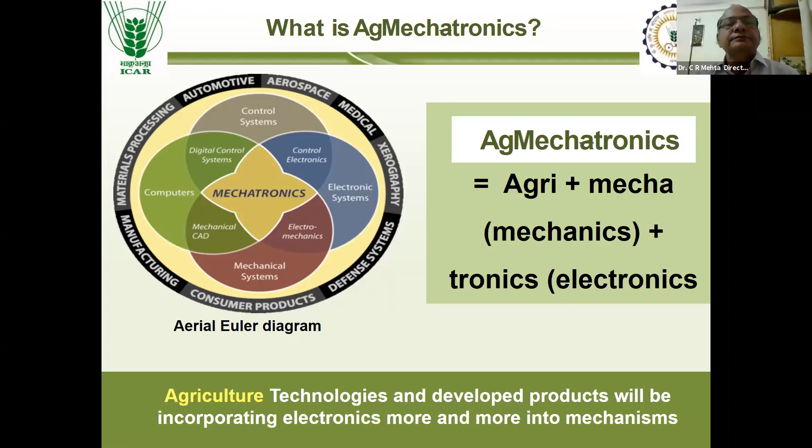Most of the time we talk about use of mechatronics in different fields, but nowadays we have started talking about it in Indian agriculture also. In my presentation, I'd like to mention that we started working in the area of precision farming in 2010, and Government of India through ICAR put a lot of emphasis on precision farm machinery during the 12th plan, then the SFC period, and presently also a lot of thrust is put on development of precision farm machinery. Government of India also launched two projects related to precision farming under NAIP, National Agriculture Innovation Project. One project was led by our institute, started in 2012; another was led by PAU Ludhiana. Some of the technology developed at PAU was just briefed by Dr. Manjeet Singh a few minutes back.

We are presently having one project on CRP on farm mechanization and precision farming. In the next plan, which just started this month, we are going to put a lot of focus on development of precision farm equipment in that consortia research platform, which has centers in different parts of the country. In addition, we are also putting focus on development of precision farm machinery in AICRP on farm implements and machinery. So at our institute, as well as some AICRP and CRP centers, we have developed some equipment related to precision farming.

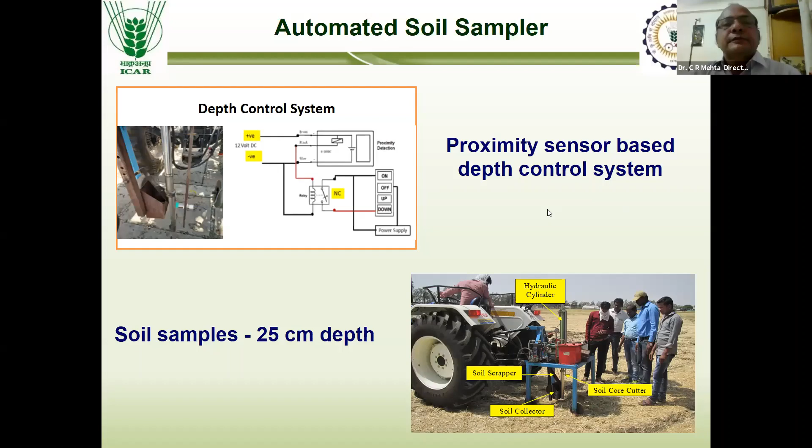We have also developed the ground speed sensor-based variable rate seed cum fertilizer drill. Generally seed cum fertilizer drills are operated by ground wheel, but here we controlled the metering mechanism using a PWM pulse width modulated motor, which works based on the forward speed of the tractor, monitored by proximity sensors. We developed this 5-row seed cum fertilizer drill, and it varies the seed and fertilizer rate based on the variation in tractor speed, also taking into consideration skidding and slip in the field.

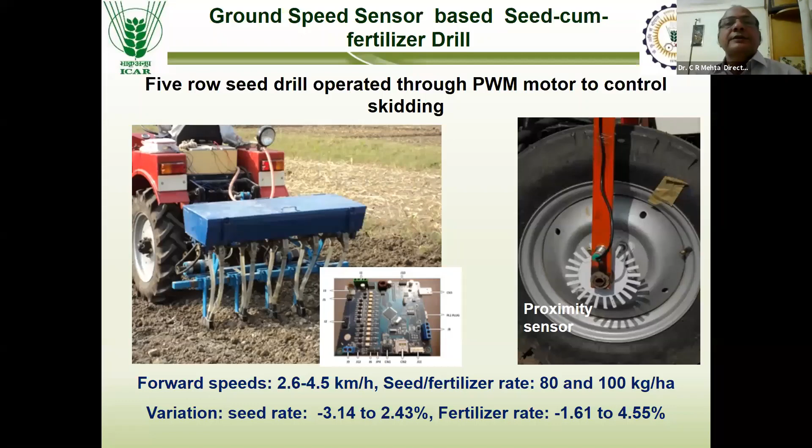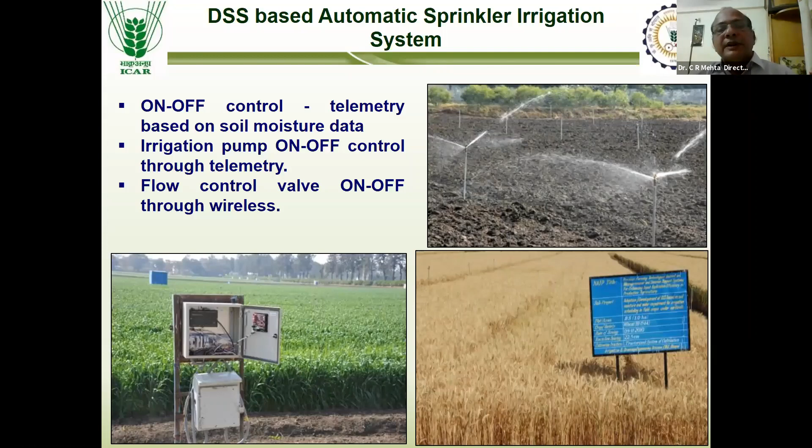At our institute, we have also developed the DSS-based automatic sprinkler system. It works on the basis of moisture availability in the field and was operated through a telemetry system, which allows it to be operated and monitored remotely. Presently, we are working on an IoT-based smart irrigation system at our institute.

Our scientists are also working to study water stress indices using spectral reflectance and thermal imaging. They used a commercial thermal image analyzer, and also developed a thermal imager with Raspberry Pi using an IR sensor, RGB camera, and GPS module, which they evaluated for wheat crop at our institute. In the next stage, we are planning to remotely operate the irrigation system based on the thermal stress of crops in the field.

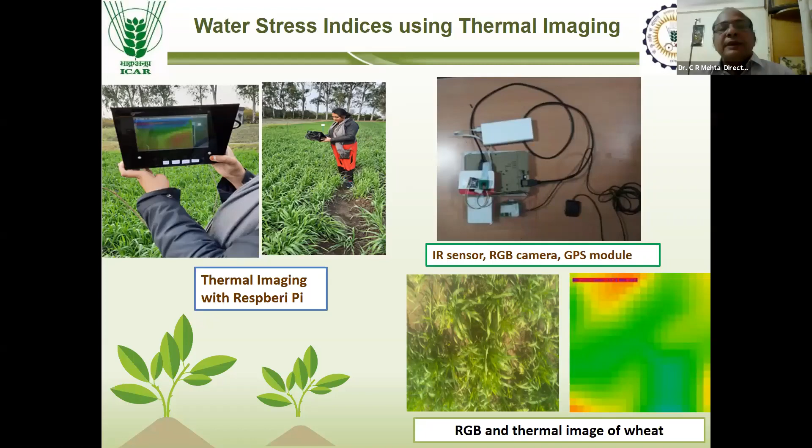We have also developed an automatic irrigation system for rice crop. In that we used a reed switch float sensor with magnet fitted in a tube for measurement of water depth, particularly for rice fields. This water level sensor, operated by solar panel, transmits its signal through an RF module to the controller, which then operates the pumps remotely. We first predefined water level boundaries, like for surface irrigation 1 centimeter, 3 centimeter, 10 centimeter, and for subsurface water level 10 centimeter, and these can be varied. Based on that, when water reaches that level, the system triggers and automatically starts irrigation in the rice field.

This whole system costs around 10,000, so it can easily be applied by farmers, since there were questions about developing technologies that can easily be adopted by farmers.

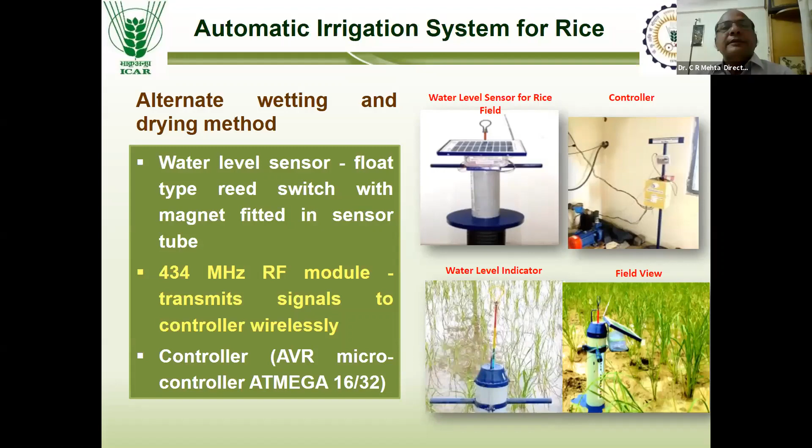We have also developed a SPAD meter at our institute. Dr. Manjeet Singh has also shown one SPAD meter, and presently most countries are using the Minolta SPAD meter. The SPAD meter is suitable for knowing the chlorophyll content of leaves, and the Minolta SPAD meter costs around 1.5 lakh, whereas we have developed a light sensor based SPAD meter using the TSL 235 R sensor.

Here we use two LEDs having wavelengths of 653 nanometer and 931 nanometer, and this SPAD meter costs only 2,000 rupees. We compared its performance with the SPAD meter imported from Minolta and got an R square value of 0.99. Recently we licensed this technology to a Delhi-based entrepreneur who is going to multiply it, and soon this technology will be adopted, particularly by KVKs in our country.

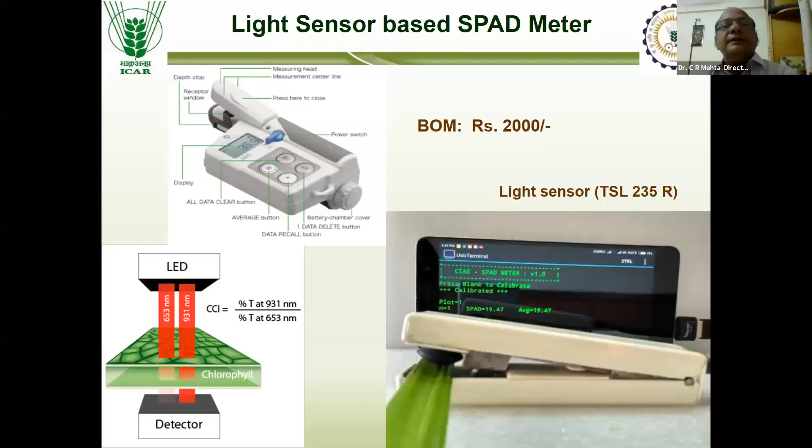The scientist who developed the SPAD meter is also attending this webinar.

We also developed a multilingual nitrogen fertilizer dose calculator at our institute. This calculator works on the basis of the NDVI value, which was explained in earlier presentations during the webinar. Based on the NDVI value of the crop, we get fertilizer recommendations, which can be given to farmers so they can vary the fertilizer rate, or we can use a variable rate fertilizer applicator for that purpose.

We have also developed a similar web-based application.

We developed a variable rate urea applicator for top dressing, using a handheld green seeker, operated by a 6 volt 4 ampere hour lead SMF battery, with a swept width of 4 meters. We first studied the NDVI value at different growth stages of rice and wheat crops, and developed a real-time relation between NDVI and fertilizer dose requirement for crop tracing. We then developed this equipment, capable of varying the fertilizer rate in real time based on the NDVI value of the crop at that particular time.

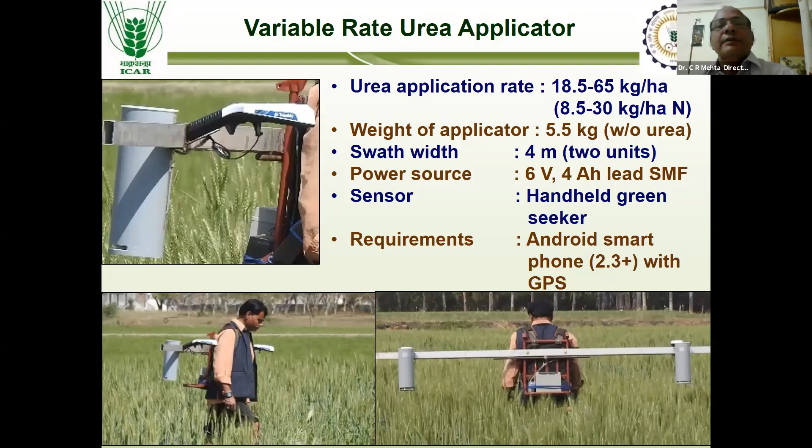We have worked on a GPS-based variable rate fertilizer applicator. For that, we worked at IIT Kharagpur and CIAE Bhopal, simultaneously under AICRP on Farm Implements and Machinery. We first developed a nutrient availability map of the field manually, and then developed a variable rate applicator which varies the rate at different grid points based on the nutrient availability at that point. For that, we used different kinds of sensors like displacement sensors, GPS for monitoring location, and a controller operated by a DC motor on the seed-cum-fertilizer drill.

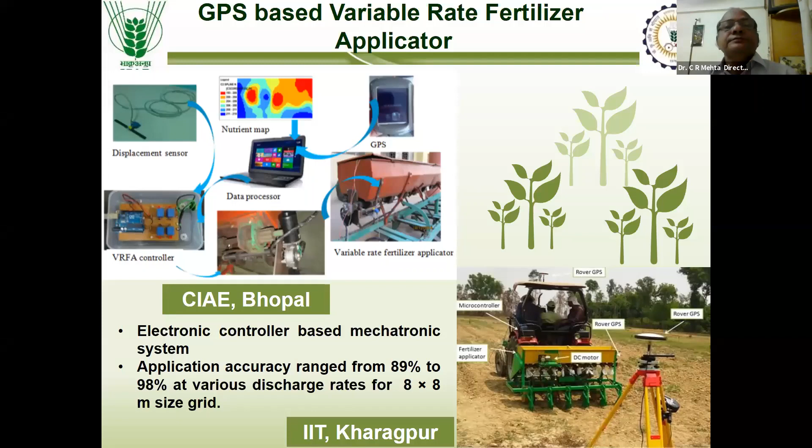My colleague Dr. Nachiket yesterday presented that at our institute we made an attempt to develop an image-based herbicide applicator system. In addition, we also made an attempt to develop a color-based herbicide applicator system. We have got some success, but there is still need to work more on this area to make a successful technology that can be commercialized.

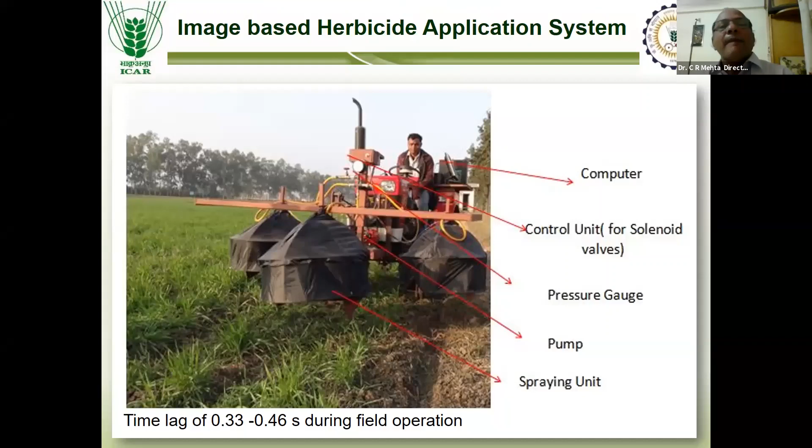At our institute, we have also developed a uniform rate spraying system, because whatever spraying systems we presently have are fixed rate type. Whenever there is variation in speed, the total application rate per unit hectare changes. So in this, we put forward speed sensors which monitor the speed of the tractor, and on that basis the flow rate of the sprayer was regulated, enabling uniform rate spraying. At turning also, we put sensors so that there is no spraying when the sprayer turns at headlands.

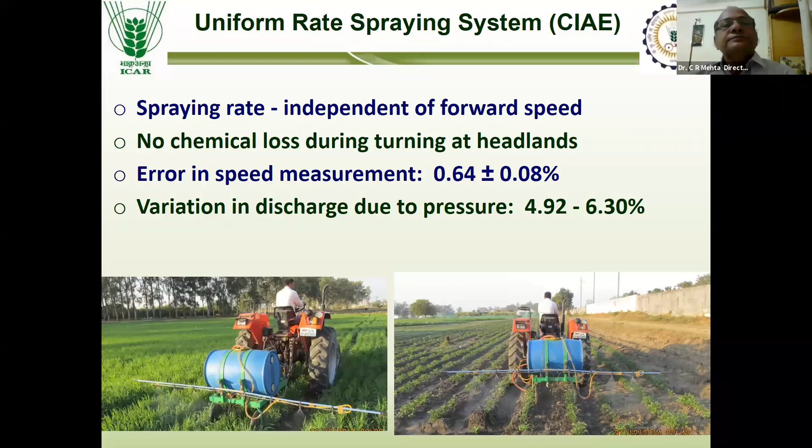At the IIT Kharagpur center, we developed an ultrasonic sensor-based pomegranate spraying system. In pomegranate, we do 8 to 10 sprayings for a crop, and there is a lot of chemical application. This sprayer is ultrasonic sensor-based, so it identifies the object - whenever there is a tree, only then does it do the spraying operation. This helps in saving chemicals by 45 to 50% as compared to uniform rate spraying with the use of sensors and sprayers.

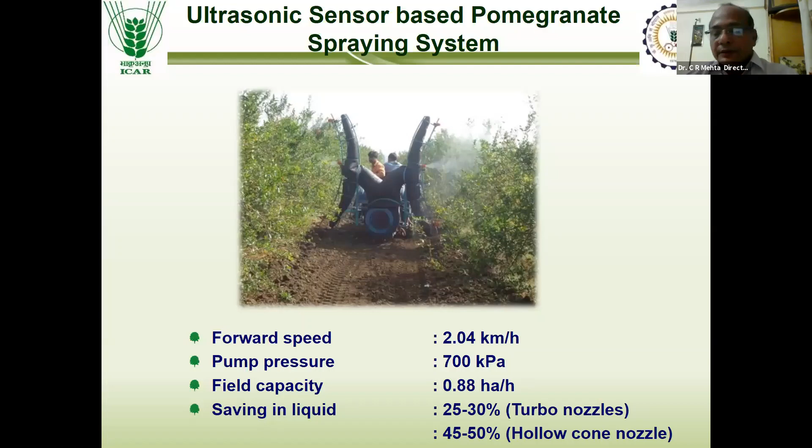Our center located at Bapatla also conducted a study on application of pesticides and biofertilizers using drones for cotton and chili crops, using tank capacities of 5 and 15 liters. They conducted studies on cotton, chili, and rice crops, and are still working on that. As mentioned by Dr. Indramani, the Government of India is going to finalize guidelines for operation of drones, and a number of institutes have already initiated activity on drones. At our institute also we have initiated activities for working with drones, and these guidelines will help everyone in the application of drones, particularly for agriculture.

We have also used a commercially available yield monitor, mounted on a commercial combine, and conducted a study on yield variation within a soybean plot at our institute, and developed a yield map. PAU's Dr. Manjeet Singh has explained about it in detail, including how it works.

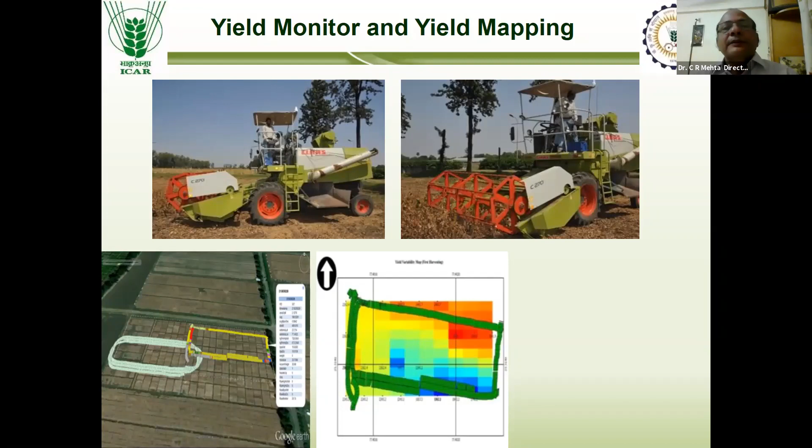I have shown some of the technologies developed at our institute as well as some of our centers. There is a lot of opportunity for application of AgMechatronics in Indian agriculture, because India is a world leader in IT and a hub of those technologies, as well as a leader in remote sensing. We are also world leaders in tractors, particularly from a volume point of view, as well as in farm machinery, and nowadays we are exporting agriculture machinery to developed countries. This will help in development of smart, cost-effective machinery that can be adopted by farmers. We also have a large network of the NARS system, National Agriculture Research System - ICAR-based institutes like CIAE, IARI is also working in this field, and we have SAUs, and under AICRP we have centers in different SAUs as well as IITs. Some IITs are also attached with this NARS system, which will also help in this work.

Some of these technologies will be costly, so those may not be adopted, like application of drones for spraying or for identification of pests in fields. Such technology can be used on custom hiring basis, and the government of India is also putting a lot of thrust on custom hiring of farm equipment, so such technology can also be adopted on custom hiring basis by entrepreneurs.

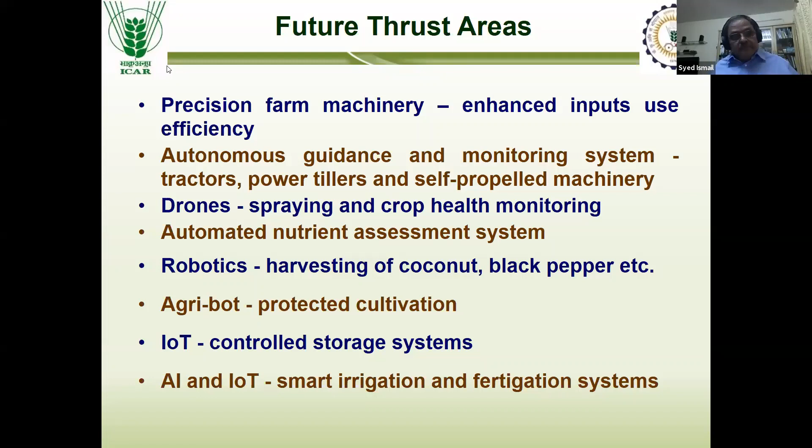Quick question, Dr. Mehta. Of late in Maharashtra, for example, I have visited a couple of pomegranate farms, and if some sort of study can be established in terms of efficacy and cost benefit of this automated sprayer, I think it will really spread like viral. Many farmers are looking for such solutions. So you need to quickly establish efficacy and the cost benefit for farmers.

I have shown one photograph with the use of an ultrasonic sprayer. That sprayer has been tested at MPKV Rahuri farm, and some manufacturers around Kopargaon have already taken the initiative for licensing that technology. Such equipment is expected to be produced in our country very soon.

Regarding the electrostatic sprayer, I recall that back in '88 I made the first electrostatic sprayer here in Mumbai. Then I remember Ganpati, a student from AIT, who worked on the electrostatic sprayer and took it to Israel. The problem was with the chemicals. We'll discuss everything in detail later.